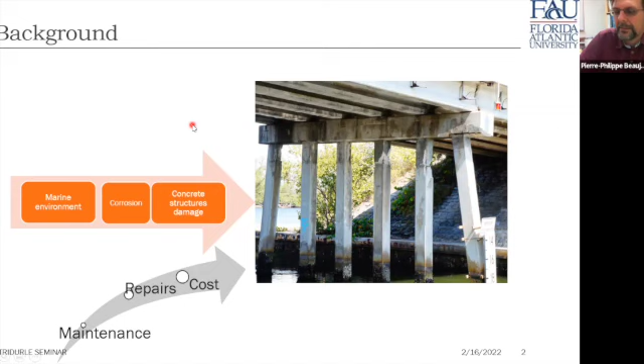Now, in terms of what is physically happening, Florida bridges are prone to chloride-induced corrosion once a chloride threshold is reached. In a partially immersed situation, such as the piling of bridges in the marine environment, the chloride ions penetrate from the exposed surface into the rebar.

The rebar underneath starts to corrode once a critical level of concentration is reached in and around the rebar. For detail on this process, I'd point you to the presentation by my colleague, Dr. Presuel, who presented a couple of months ago - his presentation should be on the WSU website. I am personally an acoustician, not a chemist, so I don't go into a whole lot of detail on this process.

What's important, however, is that initial corrosion sites can be as small as a pit, and interactions of the corroding site with surrounding steel affect how the corrosion propagates. The result, if not handled, can be significant damage in the reinforced concrete, with literally pieces of reinforced concrete falling off into the water.

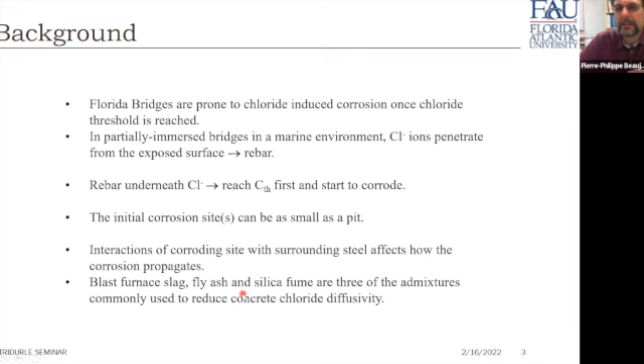There are techniques to mitigate this using blast furnace slag, fly ash, and silica fume - three admixtures commonly used to reduce concrete chloride diffusivity. By admixtures, we mean that when the concrete is mixed, these materials like blast furnace slag are added to the mix.

But here, what we really intend on doing is not mitigate this corrosion effect, but detect and identify it early. And there comes my field of specialty, which is underwater and high frequency acoustics. The idea is this: the detection and measurement of rebar corrosion in reinforced concrete using ultrasonic non-destructive testing, usually labeled NDT, has been of great interest for several decades.

The benefit is obvious: using ultrasonic NDT, the operator can monitor corrosion in reinforced concrete and ideally detect early signs of corrosion without any need to drill through or cut the concrete, which is a costly and often highly impractical process. The limitation of this approach resides in the ability to successfully detect early forms of corrosion before cracks reach the surface of the reinforced concrete.

Now, before I continue, just a little highlight: high frequency acoustic cannot produce images or data of quality comparable to photographic imagery. So the data needs a lot of processing, a lot of analysis to be fully understood.

In order to understand what these ultrasonic data give us, there's been a lot of work done. Recent publications, and I've provided a sample of this, indicate that the scientific community is testing a variety of signal processing approaches to accurately estimate the propagation of cracks and changes in rebar diameter, associated usually with corrosion, typically using narrow beam broadband acoustic transducers, such as transducers operated at hundreds of kilohertz with millimeter scale resolution.

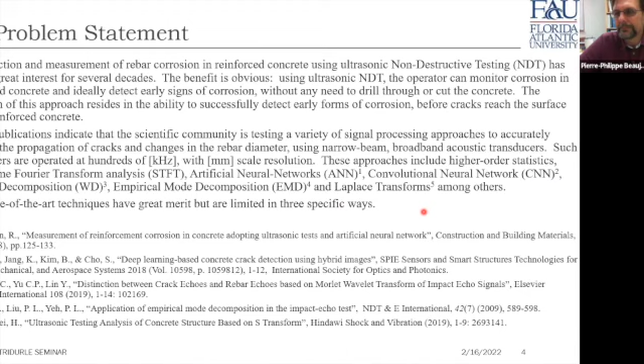The first limitation is this: early crack detection capability depends on spatial resolution. Early crack detection capability is important because we want to be able to figure out whether corrosion is taking place at a very early stage, so that we can quickly take measures to prevent further damage.

The techniques mentioned in the previous slides and in these references rely one way or another on distance measurement obtained from the time of travel of sound and an estimate of the sound speed in the concrete and rebar. Propagation of ultrasound through concrete is subject to great attenuation, mostly due to friction and signal scattering. Such attenuation increases significantly with frequency, while spatial resolution improves as frequency of operation increases, thus increasing the effective bandwidth of the transducer. So there is an issue here.

If you want to get better spatial resolution, the sound cannot actually get as far into the concrete. The result: ultrasonic transducers used to monitor reinforced concrete are often operated around 500 kilohertz, which is the sweet spot in frequency, where you get the best compromise between the range of operation, how deep the sound can go into the concrete, and how good a frequency and spatial resolution we can get.

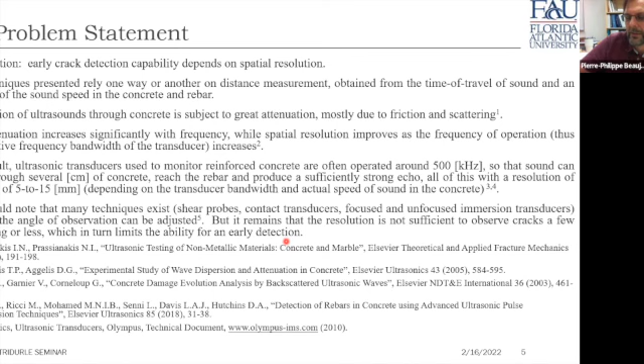The second limitation is that early crack detection capability depends on the meaningful training of the crack detection algorithm. And I'm bundling it with the third limitation, which is that early crack detection capability depends on the complexity of the sound propagation model we refer to.

These techniques mentioned a couple of slides ago require either algorithm training, for example in the case of ANN and CNN, through observation of damaged samples, or an acoustic propagation model. Now, please bear with me just one second.

Here we go. In the case of the second limitation mentioned, the performance of the approach depends heavily on the number of training samples available, and is limited to the statistical representativity of such samples. Considering the millimeter scale resolution of the transducer, the highly anisotropic nature of concrete, and the strong variation in shape and composition of the corroded areas, such statistical representativity can only be achieved through a very large number of concrete samples. That makes it impractical, because when we work, for example, on a bridge, we may only have a handful of samples we can use.

Now, in the third limitation, the published approaches rely on simple acoustic models to translate the acoustic signal into actual estimates of the damage occurring in the rebar and the concrete. There are modeling techniques such as elastodynamic finite integration technique, or EFIT, volume scattering models, and finite element analysis tools such as COMSOL, which are commonly and extensively used.

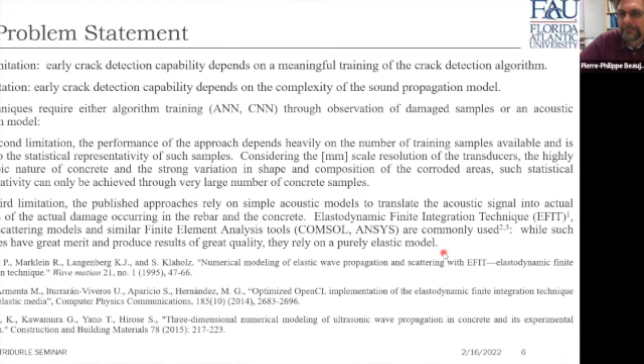Now we move to the next slide.

Some observations clearly indicate that in the vicinity of the corrosion and crack, there is a complex structure combining fluid cavities and loose concrete material surrounding the corroded rebar.

This means that a more appropriate acoustic propagation model could be a poro-elastic model, such as the well-established Biot and Biot-Stoll models developed for the propagation of sound in the seafloor originally. But at a very early stage, Biot also did some work in reinforced concrete and concrete structures as well. So the model is relevant.

In both cases of the Biot and Biot-Stoll model, fluid-filled cavities and the skeletal frame produce coupled vibrations induced by the incoming sound, resulting in a dispersive medium where two types of compressional wave, the fast and slow wave, in addition to shear waves, propagate. So that actually is a more complex and more complete model showing how sound moves and travels through concrete and reinforced concrete in general.

Now, the frequency response of a poro-elastic medium is going to be different from that of a traditional elastic or viscoelastic medium, which is usually what is modeled using techniques like EFIT, COMSOL, ANSYS, and so on.

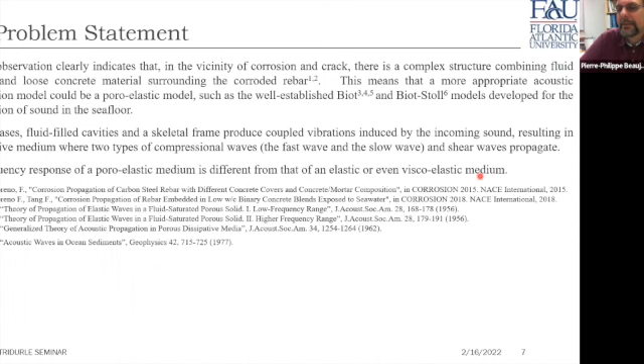Now, to conclude with the problem statement, the Biot-Stoll model, which is actually at the root of what I am presenting here, although complex, has a great benefit of tying the physical property of the porous medium, such as porosity, mean grain diameter, mass density, bulk and shear moduli, and so on, to the sound propagation through the porous medium.

As such, it is possible to fit a set of physical characteristics of the medium to a specific acoustic signature measured of the transducer. While the Biot-Stoll model has been extensively used for foundation engineering and naval purposes over the past 50 years, it has not been applied to this problem studied here.

There has been some attempts to do it, but not in the context of early detection of cracks in reinforced concrete structure due to chloride-induced corrosion.

So in addition, the author has studied and published a specific technique, that would be me, derived from the initial work by Stern to handle gradual changes of the physical characteristics of the medium and produce a synthetic response of such porous medium to a broadband acoustic impulse.

Now, such a model can handle the propagation of sound through a pure fluid, a solid, and a corroding porous medium. And I will show a diagram that explains how things are actually layered.

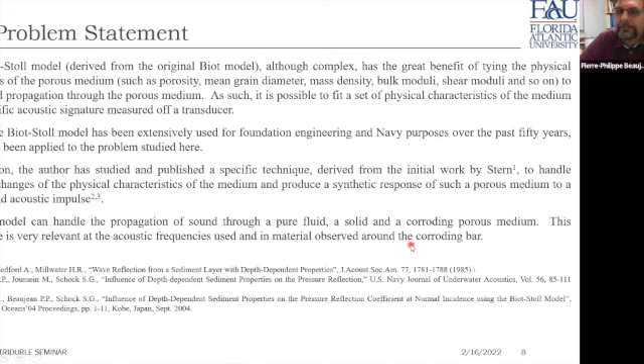Now we have stated the problem, and that was quite extensive. Here is the project goals and objective. The goal of this project is to demonstrate the ability to detect early appearances of cracks in reinforced concrete due to rebar corrosion.

Using ultrasonic non-destructive acoustic testing with no direct contact between the sensor and the concrete block, in conjunction with a Poro-Elastic ultrasound propagation model originally developed by the author for sediment application and adapted for corrosion and fracture in reinforced concrete. The objectives are threefold.

Number one, to identify the proper measurement configuration and predict the performance using the modeling of ultrasound propagation in the reinforced concrete. Two, to perform a series of targeted measurements using the proper ultrasonic transducers on a set of existing reinforced concrete samples placed in partial or complete immersion.

And three, to evaluate the degree of corrosion within the reinforced concrete with confidence level according to the Poro-Elastic model, and correlate this result with those obtained with traditional non-invasive technique, such as corrosion current and corrosion potential measurements.

Now, I would like to mention right away that today in this talk, we are going to focus on objectives 1 and 2. We are working on objective 3, which is providing a degree of corrosion and statistical information, but that actually involves ongoing measurements, which are pretty much taking place right now.

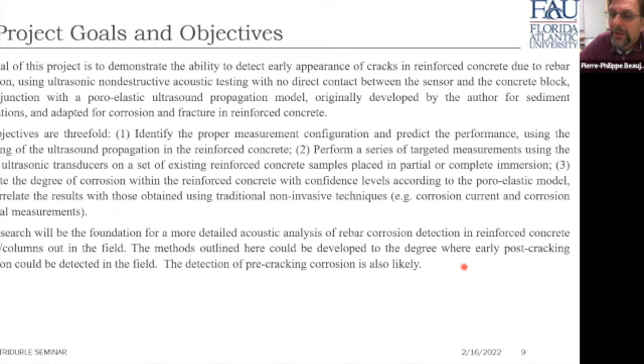The methods outlined here could be developed to the degree where early post-cracking corrosion could be detected in the field. And also the detection of pre-cracking corrosion would be likely. Now, we will see soon that post-cracking is actually a simpler problem, clearly.

Now, here's the approach. The overall approach is depicted in figures 1 and 2. So here are figure 1, which is the experimental setup, and figure 2, which actually provide the process of the ultrasonic detection of rebar corrosion.

So let me go over some text first, and then I'll go over the figures. The approach consists in analyzing a limited series of reinforced concrete samples provided by the corrosion laboratory of Dr. Presuel-Moreno

At FAU, we use a narrow beam high-frequency submerged transducer operated at 500 kilohertz, powered using an Olympus Panametrics V389 transducer, connected to an HP8112A high-frequency impulse generator, with data collected using a digital oscilloscope, Tektronix DPO3014. This choice was made because all these transducers were readily available in my laboratory and in the electronics laboratory in my department, so there was no cost associated with purchase.

Regarding detection ability in the field, two aspects must be considered: the transducer aspect and the signal processing aspect. It is understood that a submerged transducer is not necessarily the most practical choice in field operation. We went with a submerged transducer because, number one, it's a good choice, and number two, the transducer was available. But contact transducers are a better solution.

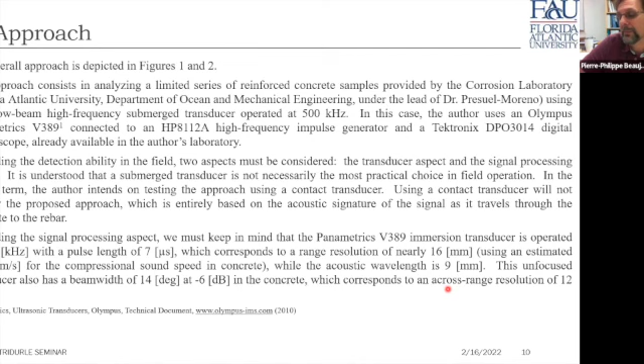So what does this mean in plain words? It means that if we were to use this transducer solely for imagery to find a concrete flaw, it would cover a fairly wide area over the rebar and would not be able to create an image with a resolution of less than approximately 9 to 12 millimeters, which corresponds to a significant crack already. However, the model itself can actually lead to earlier detection of the crack.

So is the intent. Now here's the experimental setup. The tank is over here, and we'll see a picture in a minute. In the tank, we have our concrete block with the carbon steel rebar over here. We see it from the side.

The long bar axis is X, and the vertical axis pointing downward is Z. In this side view, we can see the transducer, which is partly submerged in the salt water. The concrete rebar is fully submerged. The cone of acoustic emission originally starts from a set location along X, right over the rebar, as seen from the front view to the right. The distance between the face of the transducer and the top of the concrete block is D, and the depth of the rebar is H.

What happens is that we move the transducer along the X-axis while keeping the position along the Y-axis constant. So we line up the displacement or position of the transducer with the position of the rebar.

In terms of signal generation, the signal generator produces a 7 microsecond pulse at 500 kilohertz, 10 times a second. The signal is transmitted, and since this is a reciprocal transducer, the sound travels through the cone to the concrete. Some of it penetrates the concrete and reaches the rebar, some is reflected off the rebar, travels back through the water, and reaches the transducer again. So we have a series of echoes: a surface echo from the concrete, an echo from the rebar.

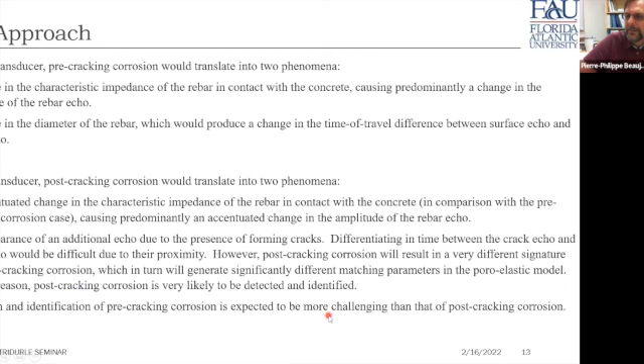Now, here's our progress to date. We have completed the development and testing of the Poro-Elastic model for the reinforced concrete sample. We have actually collected data on a limited number of reinforced concrete samples using the system we described before.

This setup is shown in figure 3. You can see it here—an example of a sample, the face of the transducer, and the reinforced concrete sample. We place the transducer 12 centimeters over the surface of the concrete to ensure it operates in the far field, so we don't have near field interference issues.

We can see it from the side, and this is the view from the top. As you can see, we align the transducer carefully relative to the rebar and move the transducer along this direction.

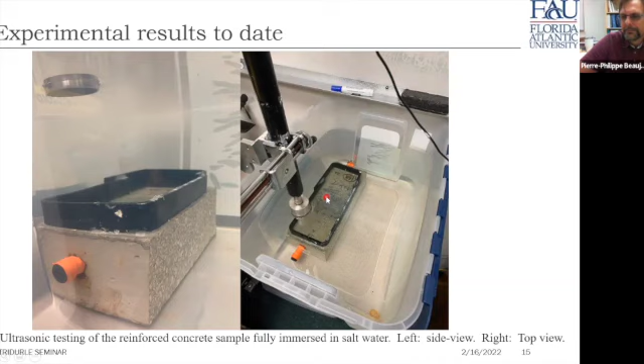A sample of experimental results is shown in figure 4. The transducer was carefully placed on top of the corroded rebar and moved along the axis of the rebar in increments of 5 millimeters. The initial position was 2.5 centimeters off the edge of the concrete block, measured relative to the center of the transducer. The last position was at 9.5 centimeters off the edge of the concrete block.

At every position, 10 acoustic signatures were recorded. In order to reduce electric and thermal noise contained in the high frequency measurement, the acoustic signature was averaged across the 10 measurements. That's what is shown in figure 4.

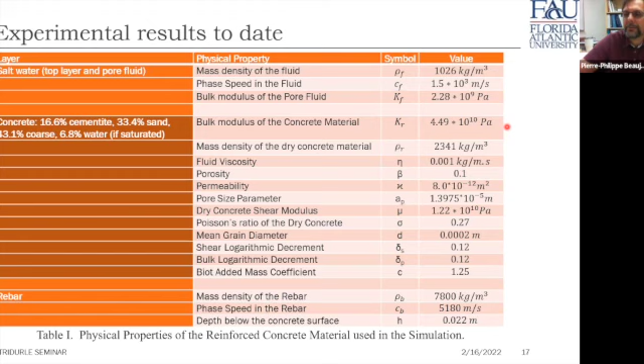Now, figure 5 shows an example of the echo measured at the water-concrete interface, shown in blue, and lined up on top of this echo, we put the concrete-rebar echo measured by the transducer. So that's an overlay plot.

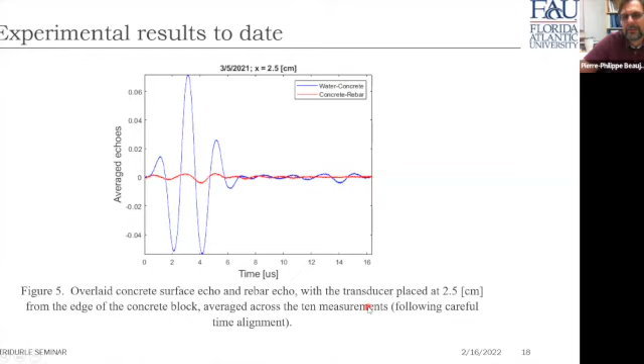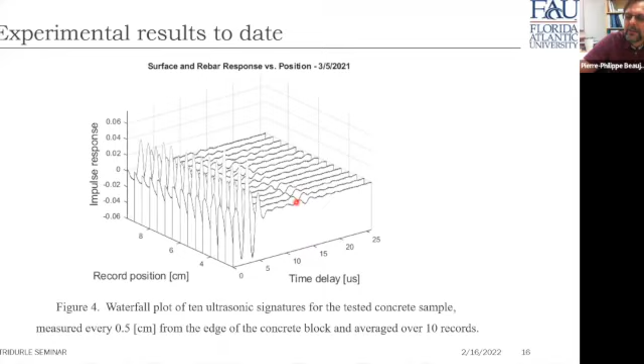There are other echoes afterwards, multiple bounces and the like, but through time gating, by carefully time-selecting the signal, we can focus on the portion of the signal that corresponds to the surface echo of the concrete block and the echo associated with the rebar.

So in this last plot in figure 6, what I'm showing is a comparison between measured and simulated results. In blue is the concrete and rebar echo obtained using the average across the 10 ultrasonic signatures. In red is the Poro-Elastic model simulation result for the same configuration, using the parameters listed in table 1.

Now, a few clarifications regarding the experimental results to date. To clarify figure 6, the focus is both on the surface concrete echo and on the rebar echo. There is an excellent match in amplitude and time signature at the concrete surface between model and measurement, which indicates that the Poro-Elastic model uses a representative set of physical parameters. In plain words, the Poro-Elastic model is doing a pretty good job given the set of physical parameters we actually used for the concrete and for the rebar, which are very close to what we believe to be the actual values.

Now, the model and rebar echo match in time delay and amplitude. As we can see, there is a good match between the red and the blue in both cases, but there could be a better match for the duration of the rebar echo. We notice that the simulation indicates the rebar echo should last a little longer and should be just a tad stronger.

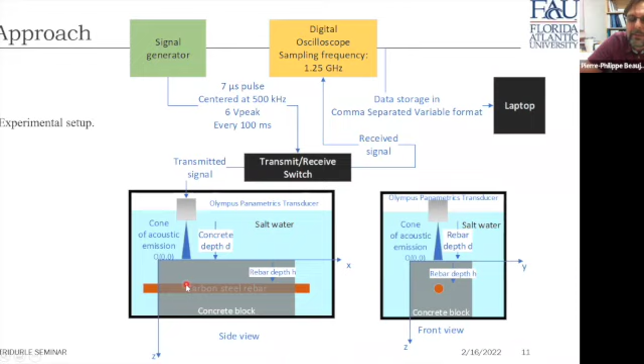The model we're using focuses solely on what is happening in the concrete above the rebar and through the first echo of the carbon steel rebar. But the carbon steel rebar is relatively thin, and as a result, there could be interference from the secondary echo coming from the bottom of the rebar, which currently we do not model.

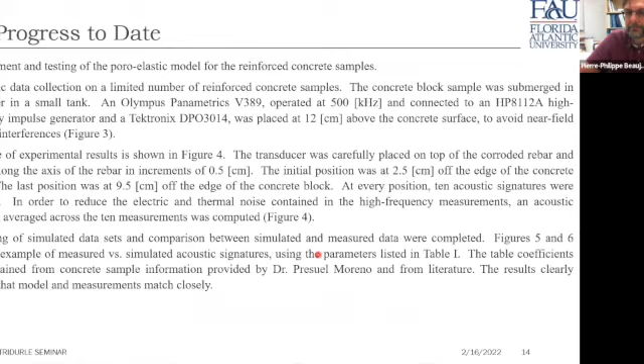So let me go back to my comments. In the model used here, only one echo is produced at the interface between concrete and rebar, when in reality the elastic rebar produces multiple echoes, as I just explained, as sound travels across both the diameter and circumference of the rebar.

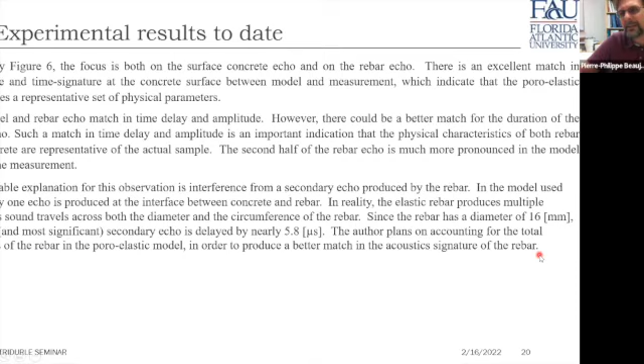Since the rebar has a diameter of 16 millimeters, the next and most significant secondary echo is delayed by nearly 5.8 microseconds. At present, in addition to the work we are currently doing, we plan on accounting for the total thickness of the rebar in the Poro-Elastic model to produce a better match in the acoustic signature of the rebar. But as is, the match between measurement and model is of sufficient quality that we should be able to identify early cracks as they form.

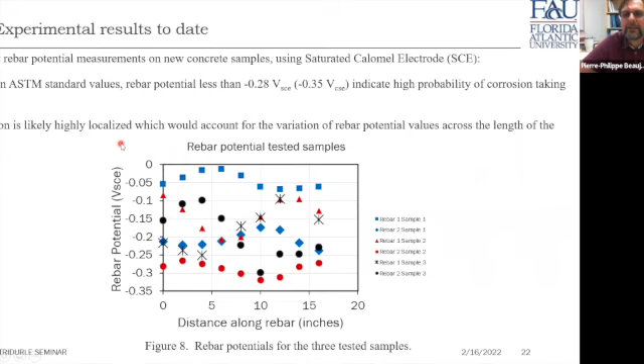For these 2 slides, this is predominantly the work performed with the help of Dr. Presuel, and this is his field of specialty. What I want to get out of this is that those 3 samples, according to the potential measurements, clearly indicate a gradual increase in corrosion in the rebar, which would indicate that these 3 samples would be good candidates to look at the difference in signature when it comes to corroded rebar versus non-corroded rebar using ultrasonic testing.

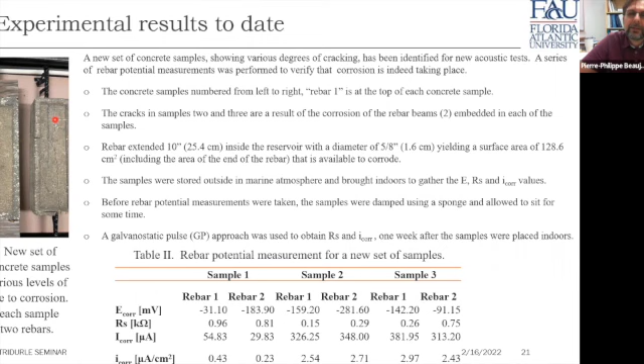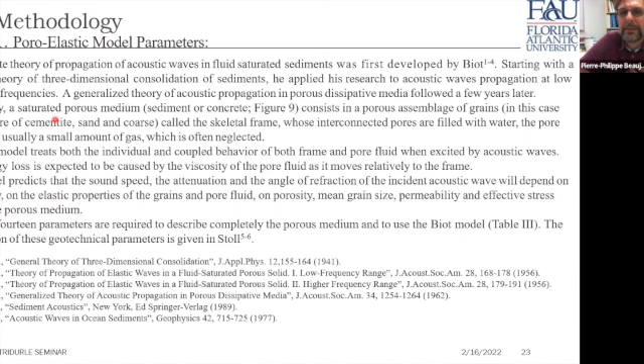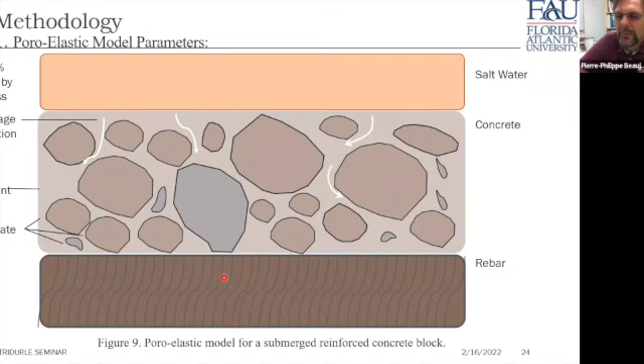We use 14 physical parameters in the Biot-Stoll model, or the Poro-Elastic model we use. We match all these parameters using a comparison between the model and the measurement we make. We match the modeled acoustic signature and the measured acoustic signature to identify the value of these parameters. The value of several of these parameters will change as cracking is taking place.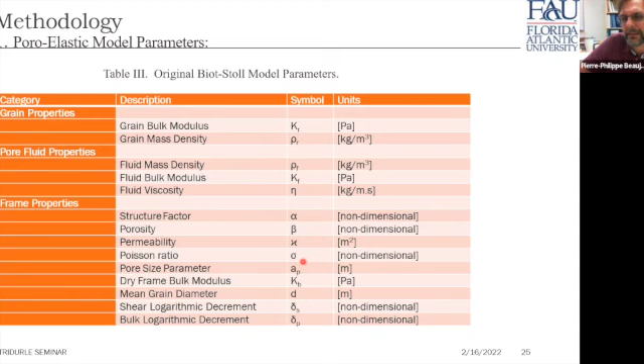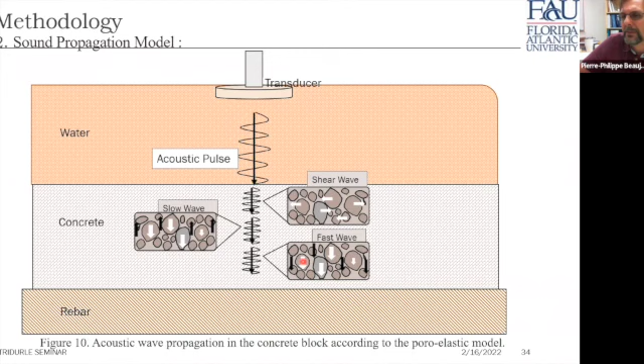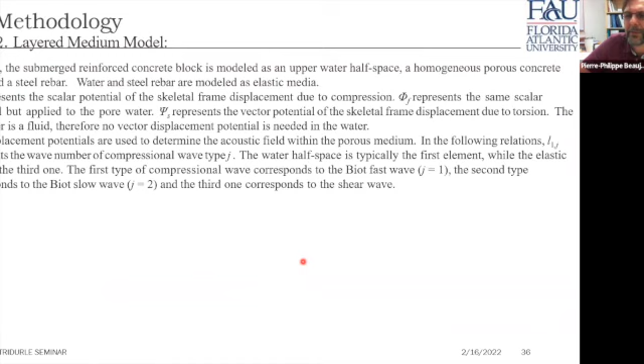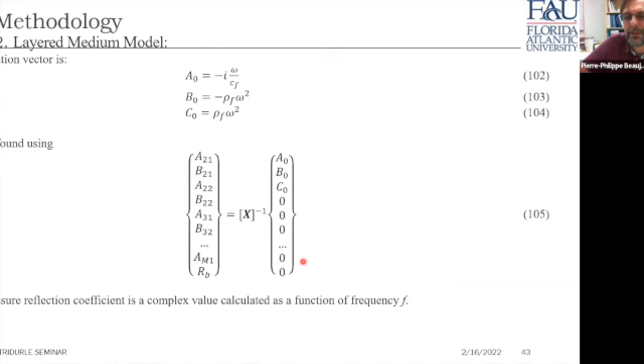In the methodology, I provide all the equations, the fundamental equations associated with the model itself. If you are very interested in the physics and the mathematical foundation of this model, everything is provided, but I unfortunately do not have time to cover it today. It is a fairly involved model, much more complicated than a traditional viscoelastic model. But at the end of the day, what we obtain is the response using this model, shown in figure 6 of slide 19.

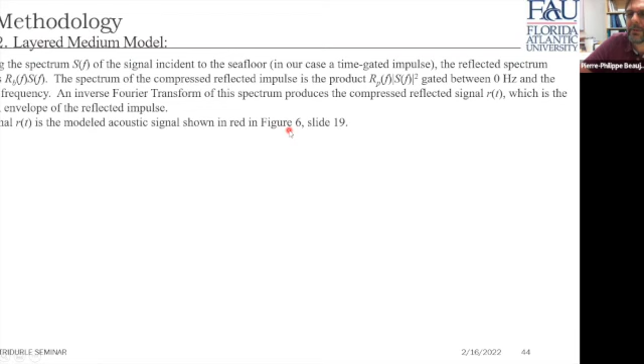Now let's jump to the conclusion, given the little time we have left. In terms of conclusion and ongoing work, I mentioned first that there is some improvement needed in terms of matching what the model produces and what we measure, in particular when it comes to the secondary echo coming from the rebar.

I would like to mention, and this is really important at the bottom of my conclusion, that as we speak, we are actually testing the nonlinear solver based on the trust region reflective algorithm to refine the physical parameters of the acoustic model, in order to improve the match between the model data and the measured data.

In addition to that, we are performing ongoing acoustic measurements with the new 3 samples that I showed in the previous pictures: a sample with very little corrosion sign, a sample with some amount of corrosion in the rebar, and a sample with severe corrosion. These samples are undergoing acoustic measurement, and we are in the process of matching the measurements we made with what the Poro-Elastic acoustic model would predict.

So this is the stage we're in. And with that, I will conclude with some questions.